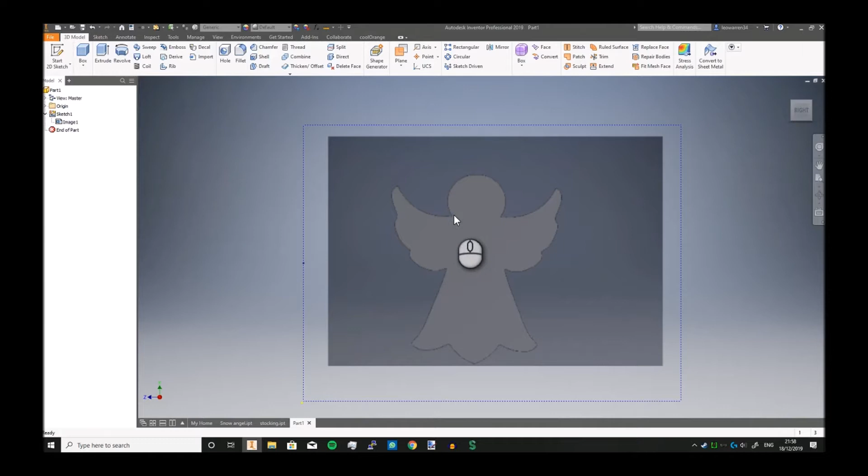In today's video we're going to be making a snow angel. Let me flick back to it like this. Here's what I made last year. We're going to improve upon it and make it a little bit neater.

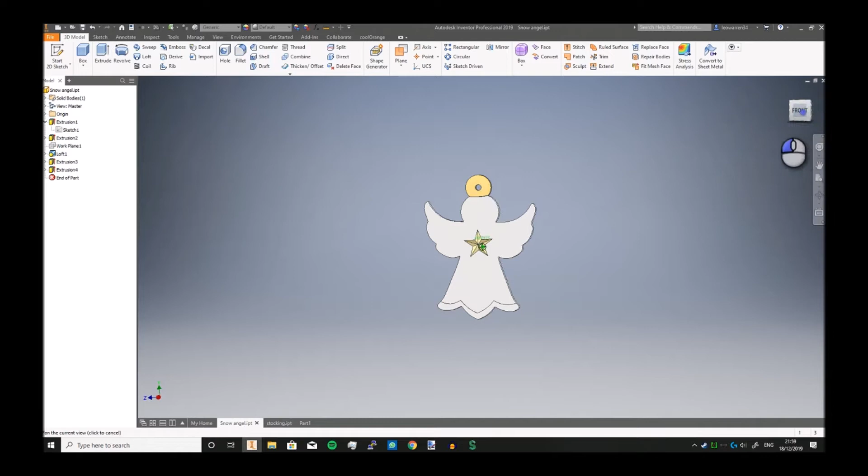I'll admit this was kind of cheated because I used a trace image, which I've got here. I'm using a different one just to avoid copyright issues. This one's got a rough shape. You guys can follow along if you want, just find any clip art image you want to trace, it's quite simple, so let's get to it.

So grab my parts, let's start a sketch up, insert the image, and if you then just click on the sketch, launch into it, and we can start making sketches to trace.

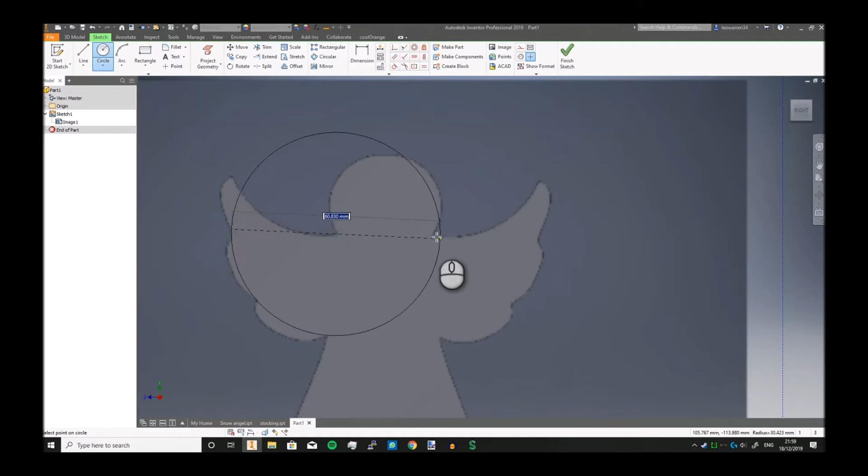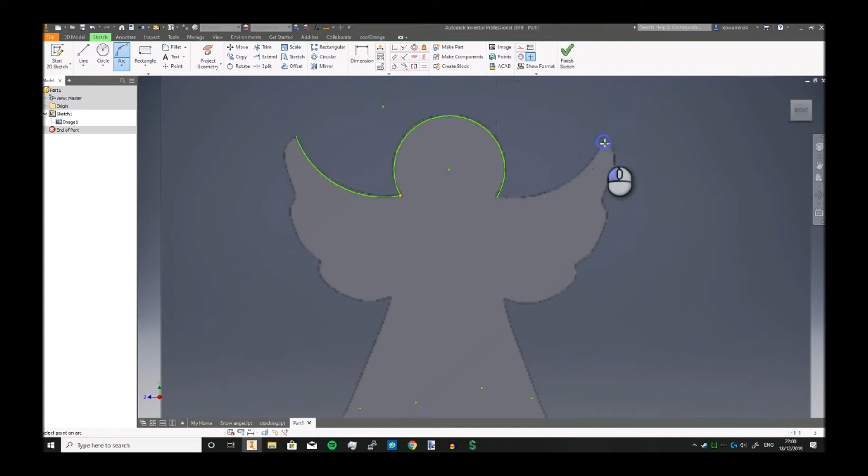We're going to drop a couple of circles, we want an arc, and we're just going to drop an arc around, an arc there, an arc there, an arc there, and an arc there. So you've got a nice base. Job done, and we can also cover the wingspan. Job done, and job done.

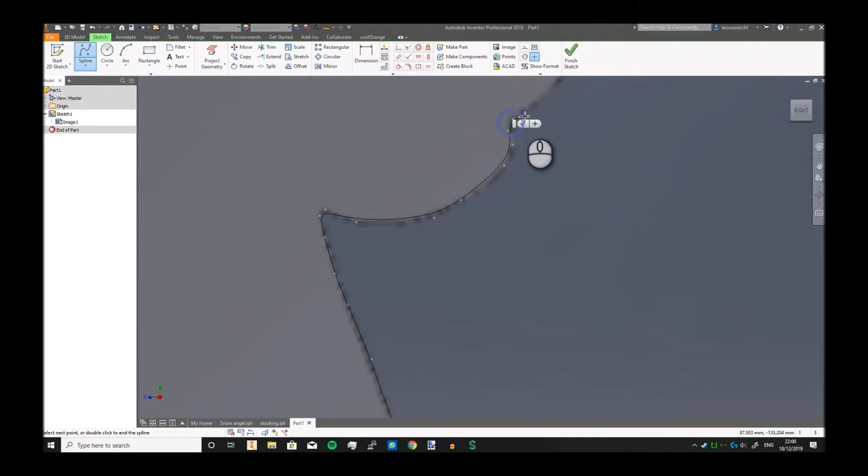Now this is where the most important part comes in, the control vertex spline, because this is the most tedious part. You've got to make sure you select it carefully, otherwise a full body won't form. This is actually my second redo of this video because it didn't work, and I realized just at the end of the video that it didn't all link up, so fun.

But you see, as we trace around, that's why I tack it right onto the end there, tick, just to make sure.

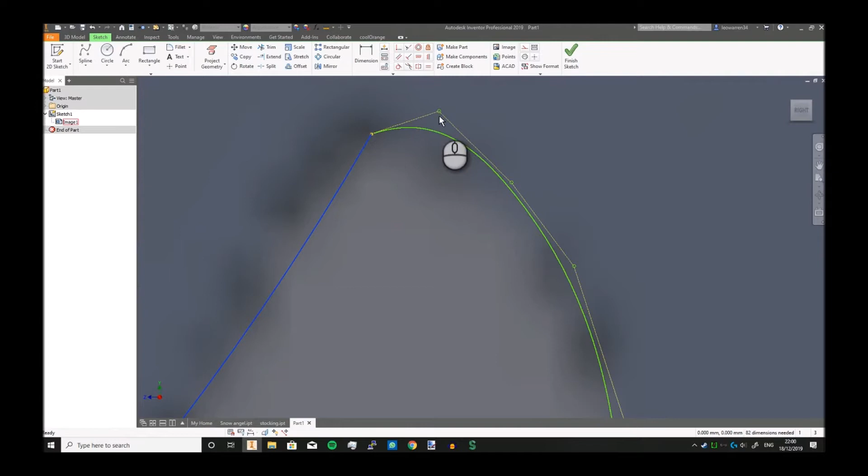But that there is a bit of a harsh angle. Don't worry, we can adjust that, we can make it more like that, you see. The beauty of it not being fully constrained is that it gives us maximum flexibility.

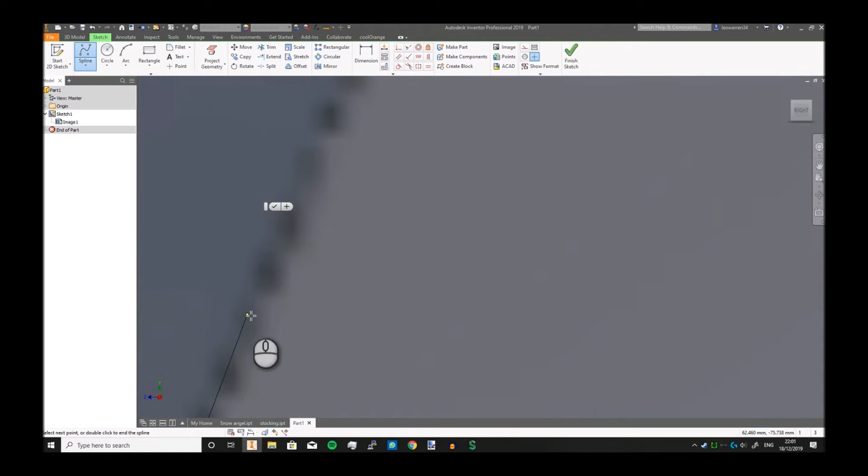We can constrain it, but since this isn't vital, it's more just for fun, I'm not going to focus on constraints, especially with splines, because we'll end up with hundreds of dimensions defining each little vertex point, which is just horrible. If you work with basic shapes, then yeah, go for a constraint, but when you've got a spline, see how many points I'm dropping down.

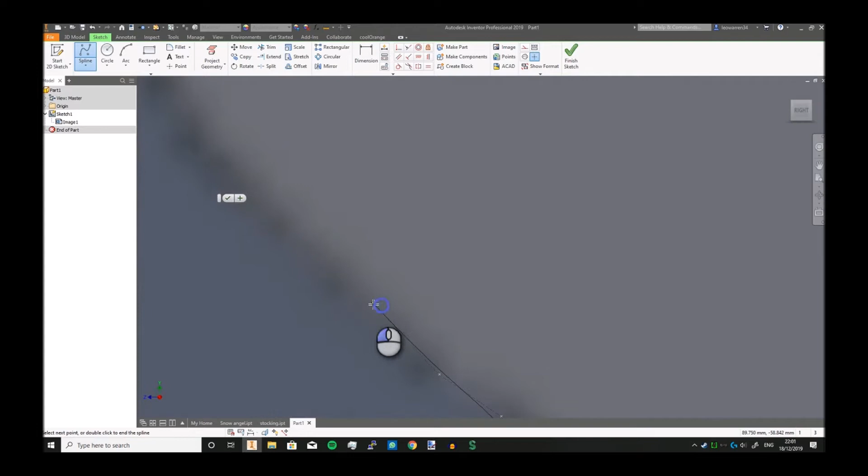You can drop more, you can drop less, you can be coarser, but obviously the more you put down, the smoother the spline is. You can also zoom in and out more to cover more ground. I've got to do this reasonably quickly, which is why I made so many mistakes previously.

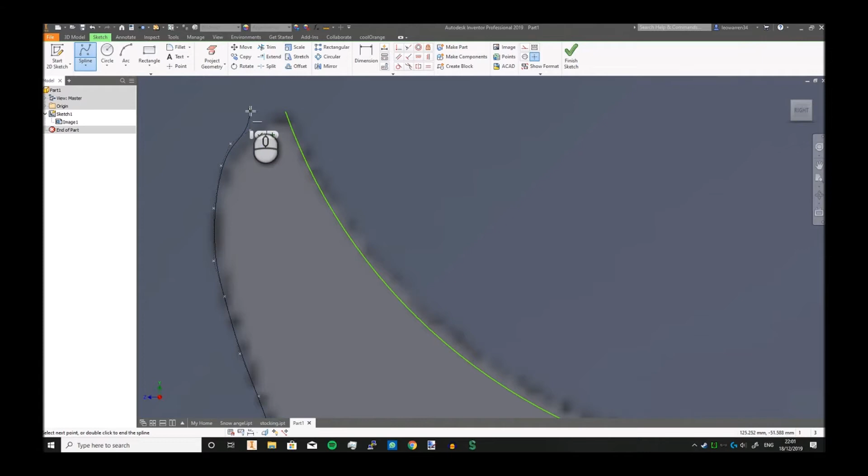Come up to the final bit. So I'll make sure I actually connect and click. Tick. Nope, I want to actually fully bond it. Oh.

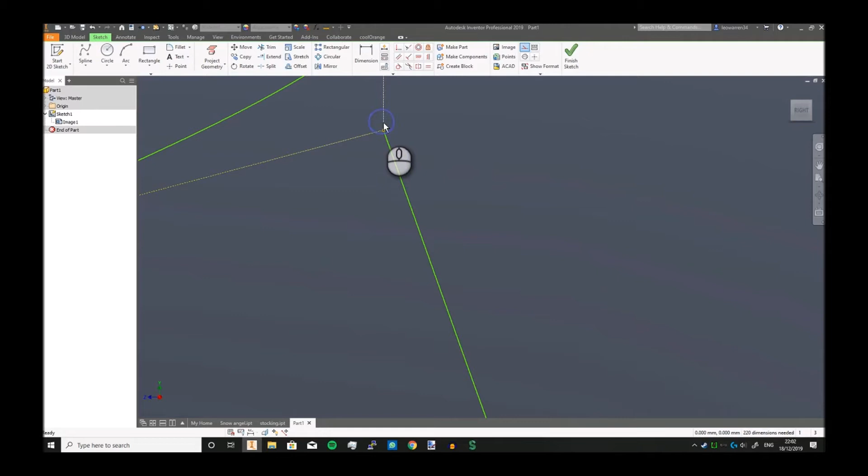Actually put the constraint on there, which is rather irritating. So let's redo this again. But firstly, we'll just adjust that, and we'll go around with the spline again.

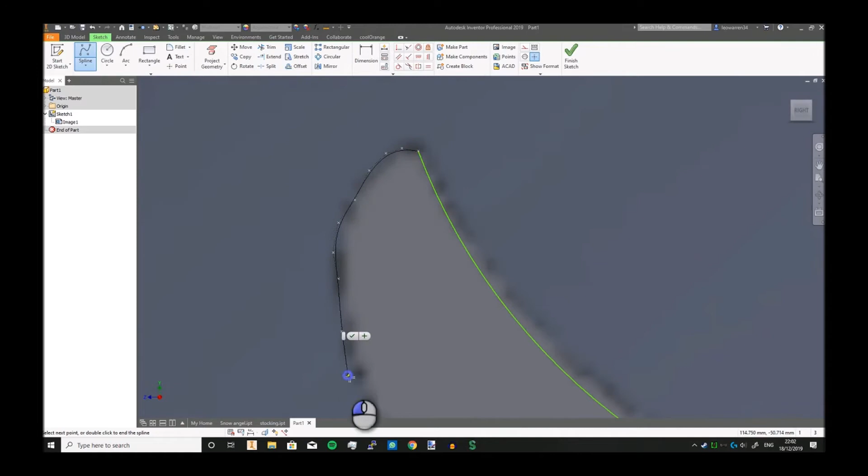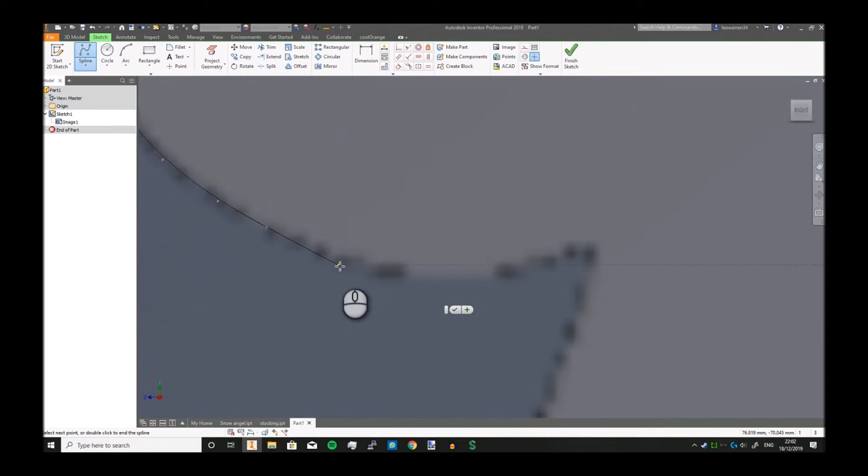You can probably tell I don't really have that great of actual video editing skills. I end up using Movie Maker because certain companies who focus much more on photography, nudge nudge wink wink, Adobe, don't do free student licenses like Autodesk. Autodesk is great because I can show you loads of skills, make no money off it, but still show you lots of skills at the same time. Being a student, I don't have a budget to afford expensive software.

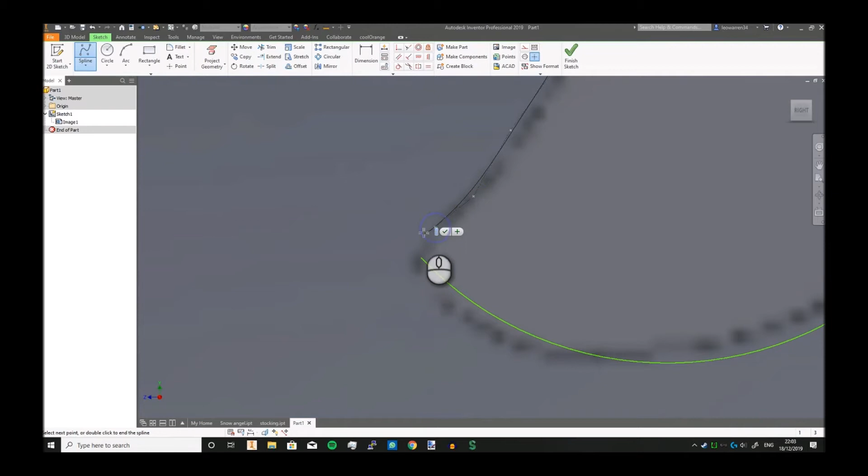Unless I get into some other groups, I doubt I will ever be able to afford it unless I ever get it at cheap or a discount, which rarely if ever happens.

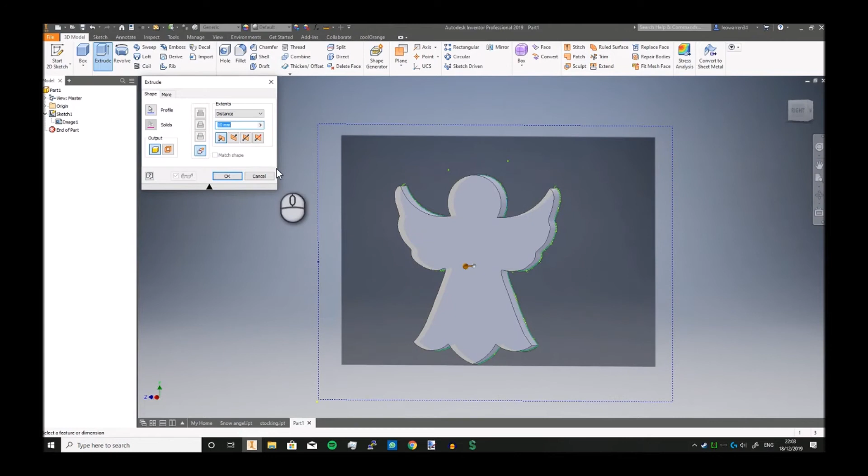There we go, and we can then make a couple of adjustments. We can just draw it out there. Click Finish Sketch, click Extrude, and there we go, finally - it's actually drawn out properly. And we can try to put this to 5mm, make it a rather delicate one.

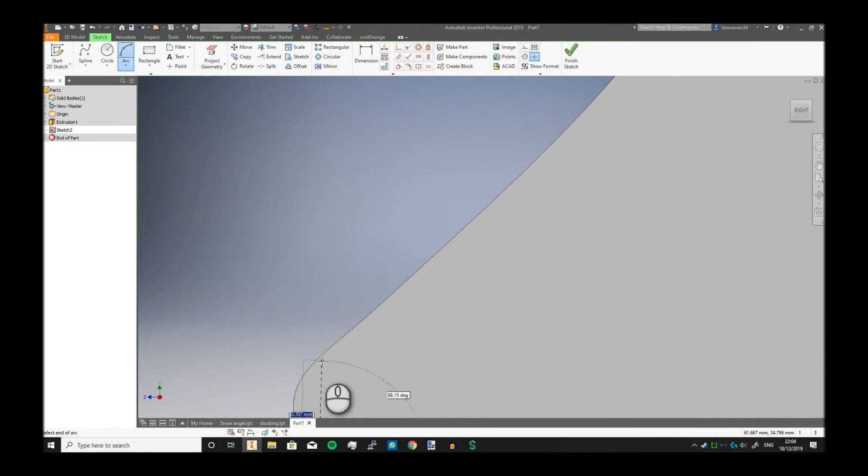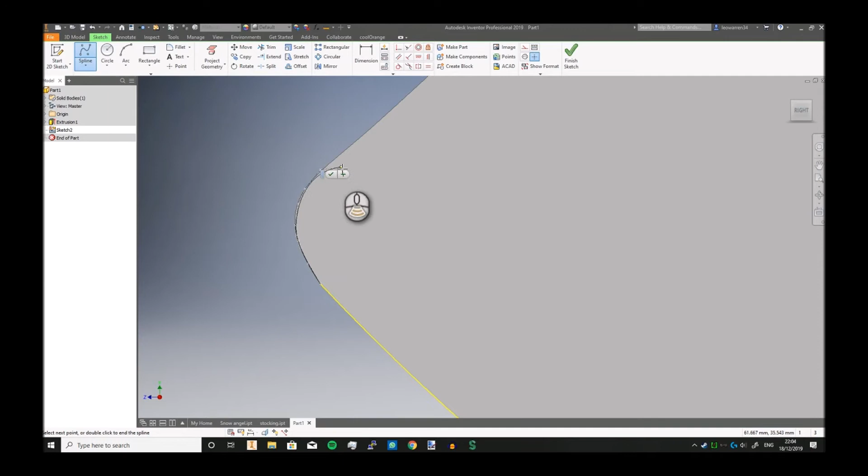We can now make a couple more sketches. Firstly, we're just going to project the bottom edge as well as just a bit of a bottom arc here. Actually, no, we'll just project this - we'll just re-spline it to the best of our abilities. You can redo this in any way you like. This is just me doing it roughly, and you can just adjust it, bring it in, bring it out, do whatever you need. So once you've done that, you can then pretty much just do the same.

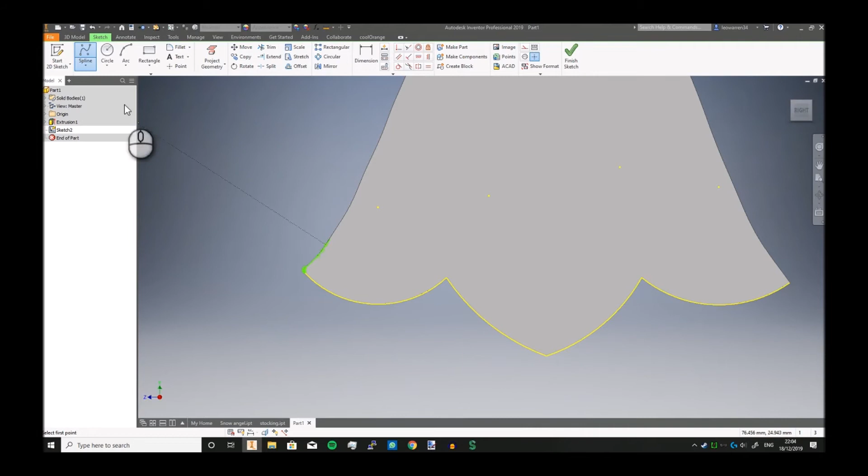Actually, no, what we'll do first is we can then just basically do a little bit of offset work. So if we just put that above there, do that - and this is kind of where it's up to you what you do with decorative parts. This is me being extremely crude, but ultimately, do what you like.

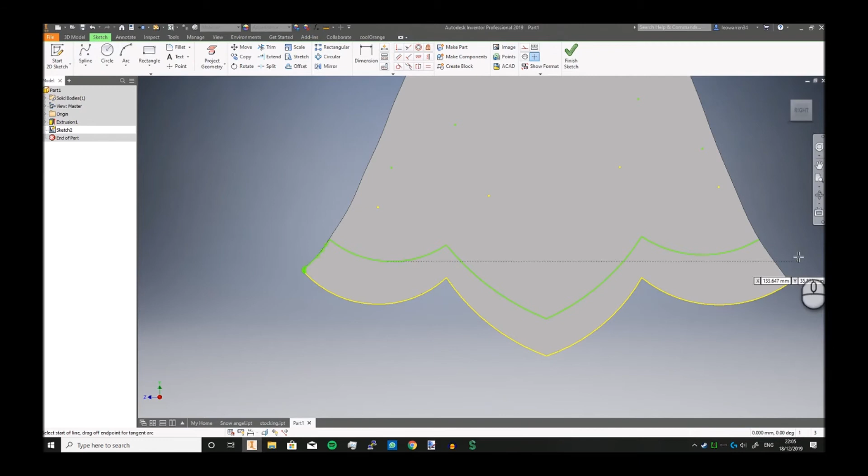Click OK, click line, and I can join that to there. Click OK, click finish, click extrude. You can see I can just make that like 3. Click OK - and that's a bit thick, so I can actually make it like 1 mil, make it even thinner.

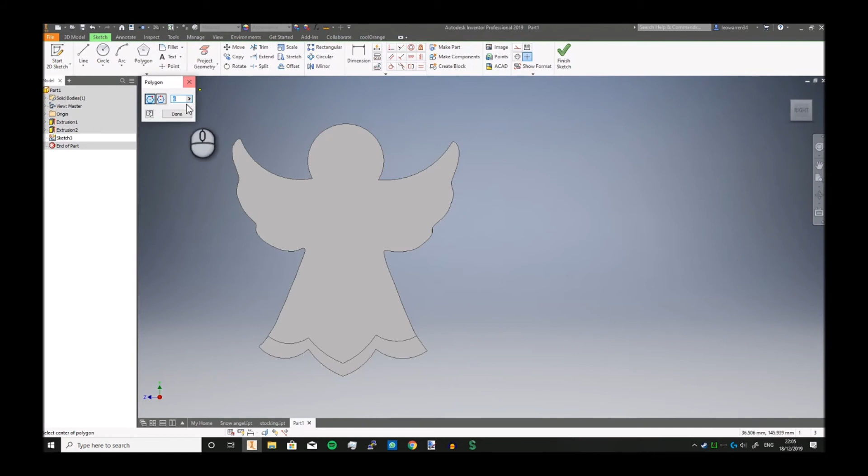The next thing she needs is a star. A star is relatively easy - we just start a 2D sketch, and we're going to grab a polygon. We're going to do pentagon, and we say to make it like, you can do whatever. Click OK, and you can just tack a dimension on, so to go 10.

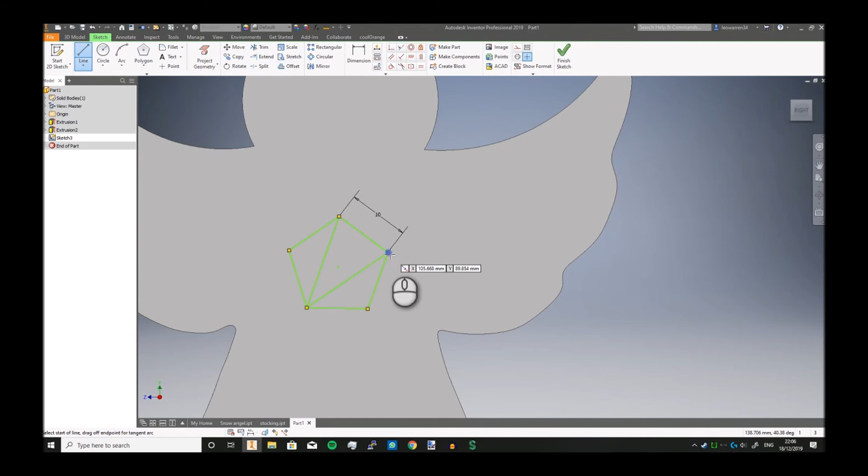Okay, right now this is where the easy part of making a star comes in. Pentagons just allow you to join every point to every other point. Quick way is just to miss a side and jump back on. Click OK, and then you can just delete all of those.

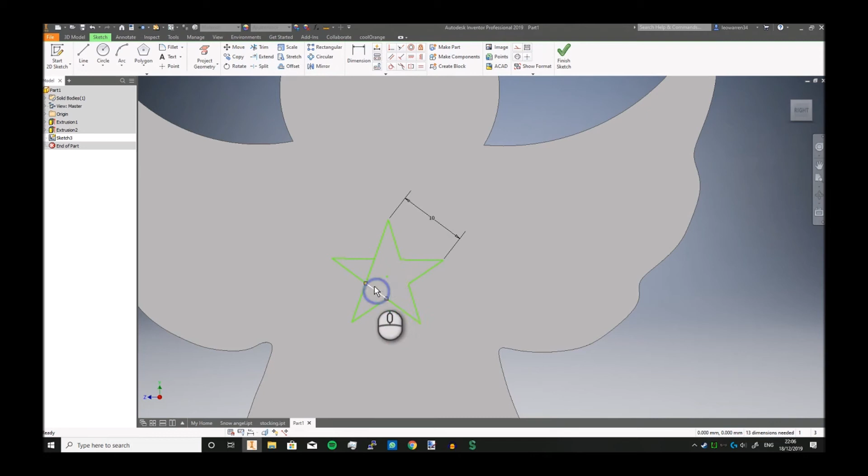And last but not least, you can just use up here - we can just use the split command. Just clicking all around, so then you can just say and go delete, delete, delete, delete, delete, finish sketch. You can then grab plane, bring it 1 mil out, or as far as you want. I'm going to say -2.

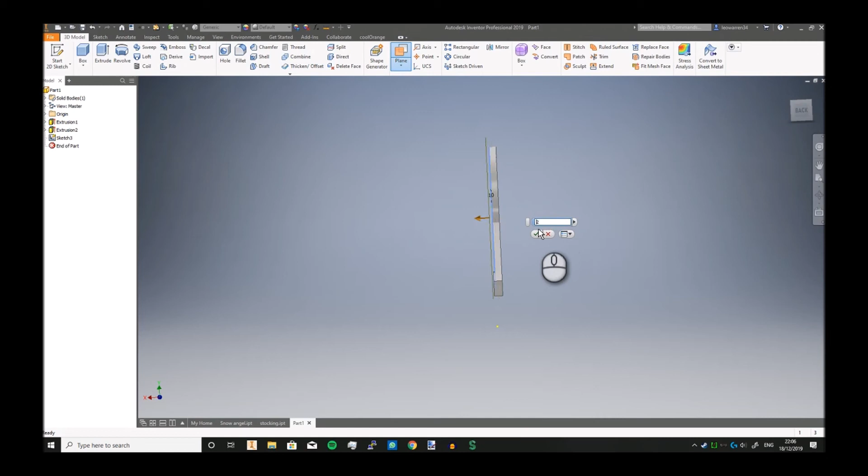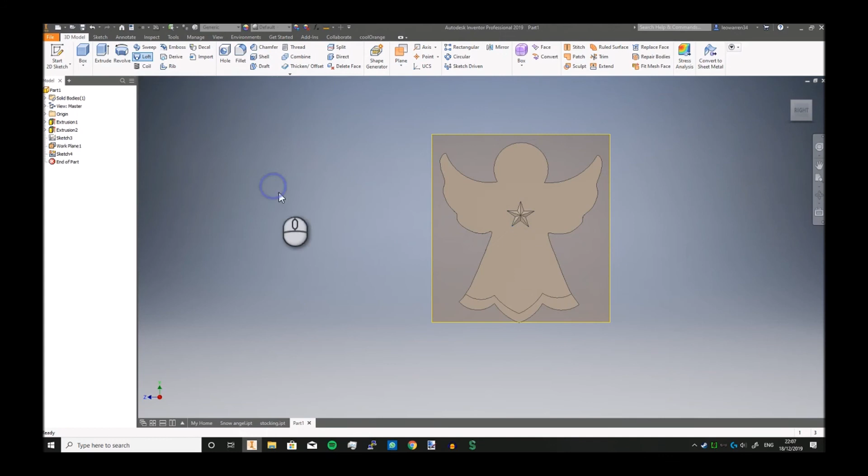Next, so yep, go that way. And then what you can then do is if you then start sketch, you can grab point. Well, actually, no, you can do one better - you can project that point through, point to point, finish sketch, and you can then just loft. Click OK, and you got a star. Easy as pie.

And the next kind of thing, well, the last kind of thing you can really do is if we bring up our planes. Now, our plane comes on the back of it, so that's to remember.

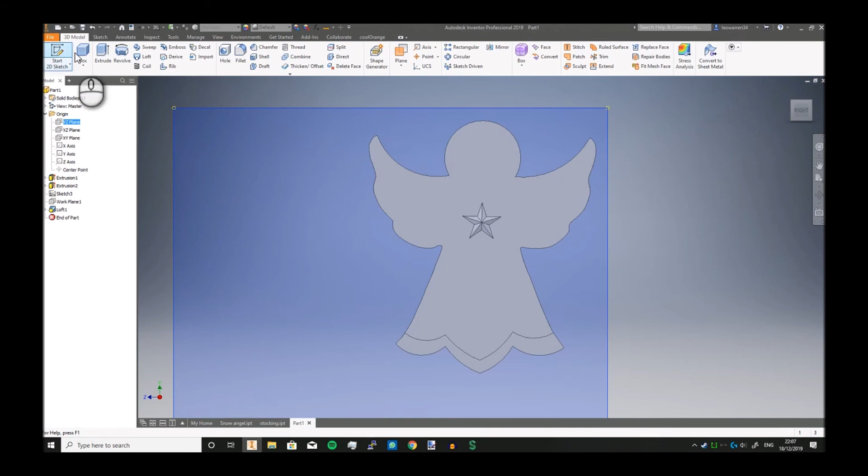And we can just start a 2D sketch, and we're just going to attach just a little hanger to her head. So we can just grab an arc, and we just grab either side, and we just drop a circle in the middle. I'm just going to put 5 mils. Click finish, and we then just extrude.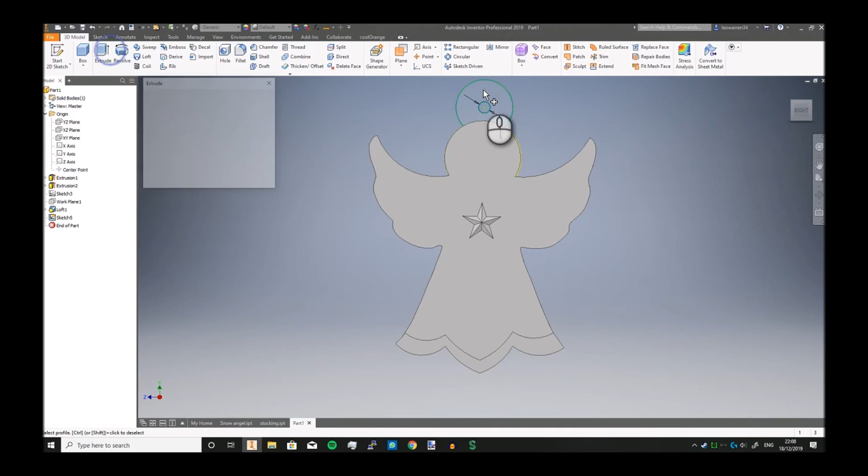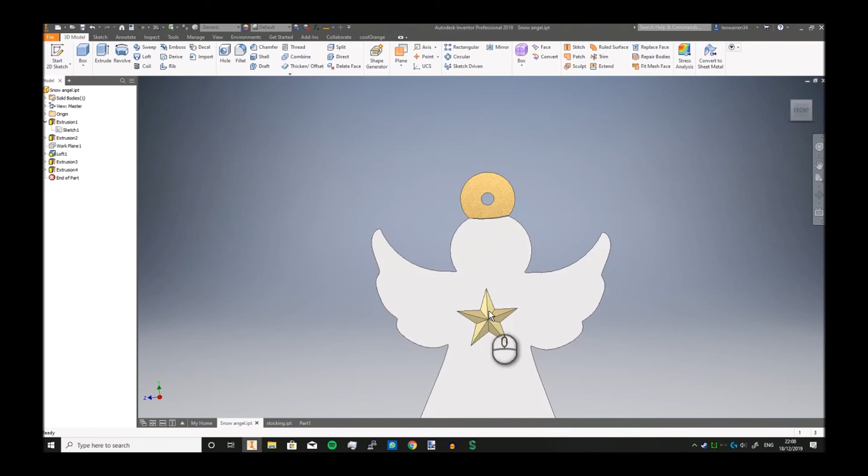Now, I wonder if - and click fill, click OK. And there you pretty much go. You can also colour it as you want. See, Snow Angel, I just adapted it. I think this has a split in, so I can actually put the gold foil in, but you can obviously colour it gold, and you can pretty much do whatever you like.